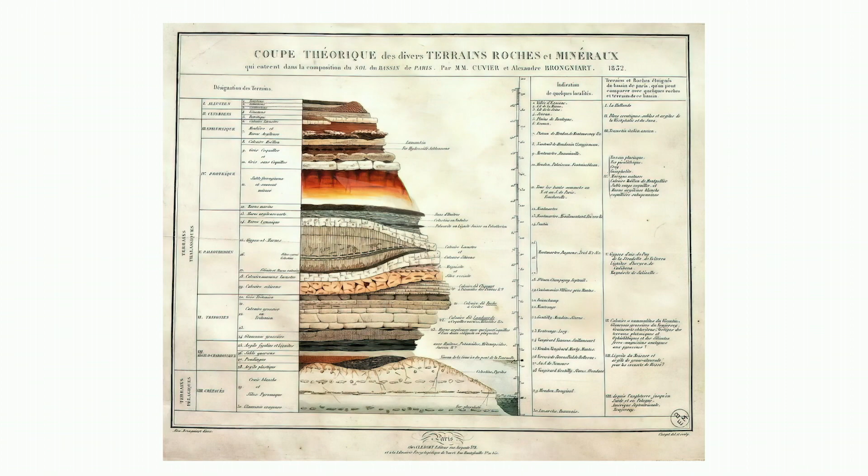So with these 2 inspirations, we have been working in many countries. I started the office 15 years ago. We've developed about 500 projects, out of which 50 were built in Europe, but also all around the globe. I will show you 4 of these projects.

The first one, number 15 — as you can see, they're all numbered chronologically, so one of the first projects, in 2007-8 I think. I was asked by Jan Mannaerts from 360 Architects to develop 4 courtyards of a woon- en zorgcentrum, a home for the elderly, that they had in Lommel.

It was interesting, this idea of 4 courtyards where many of these people would spend the rest of their lives. There were different types of communities, from more active to more passive, and we thought: if this is a kind of hortus conclusus, a walled garden, how can we bring the world to that garden? How can we give as much experience, as much sensory emotion, to these people who for the most part are confined to that space?

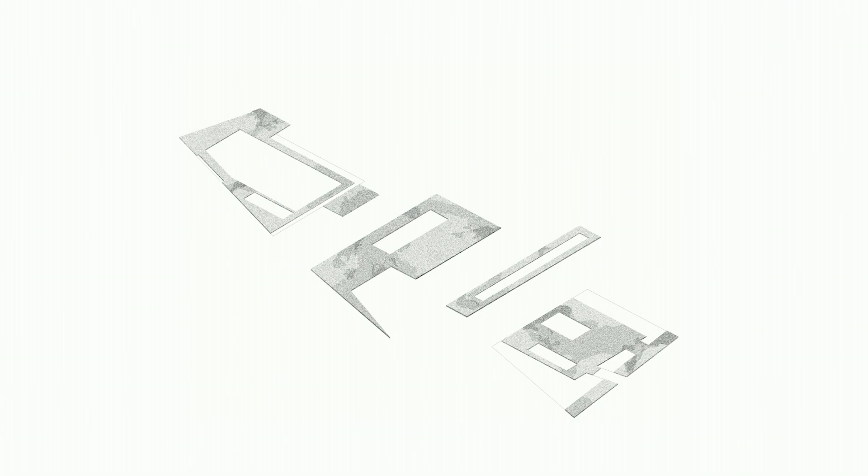So we made abstraction of the buildings, and we thought: can we see those courtyards as a kind of fragmented, continuous landscape where trees ignore the buildings and create a continuous growth, where plants could grow, where we could bring the seasons, the colors, and the smells — a kind of miniature world in which these people could live and relate to?

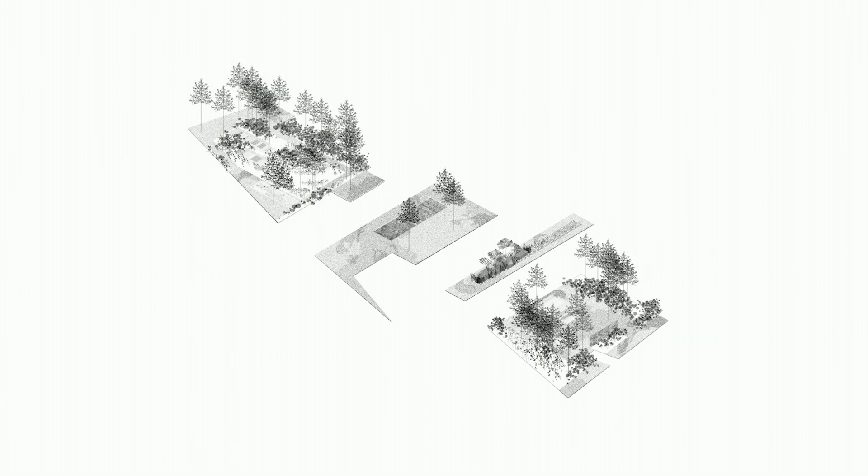The first question, of course, was what kind of hardscape do we make? What is this made of? We had a very limited budget — the OCMW has a fixed budget per square meter with which basically I could not do much more than concrete or maybe brick. And I was a bit saddened by that.

I remember going to the quarry of Hainaut and speaking to the people responsible there, who are, by the way, in the room here. I told them: is there not a way of using your material, bluestone, the most typical stone of Belgium, but for a lower price?

They told me that the leftover materials would be cut into strips of 20 centimeters. I don't know if they still do that, but we based the whole project on those 20 centimeters and on a variable length using materials that weren't A grade, but were affordable with the budget we had. So we thought, can we use those materials and work on a surface treatment to give them a flat topography.

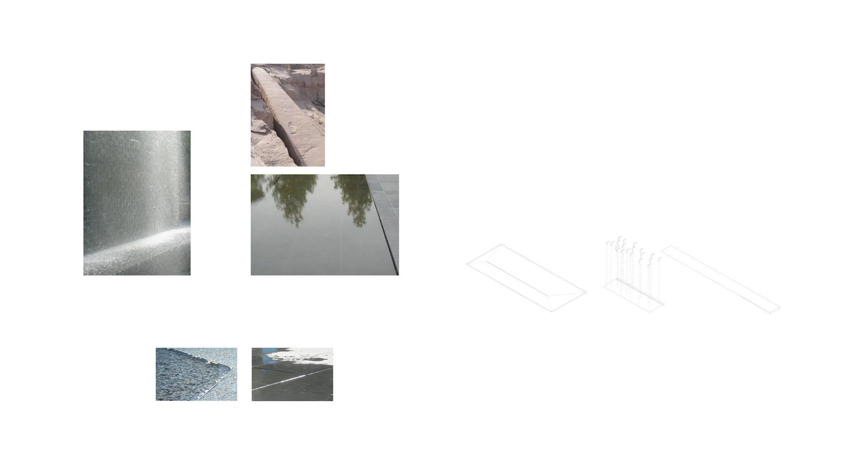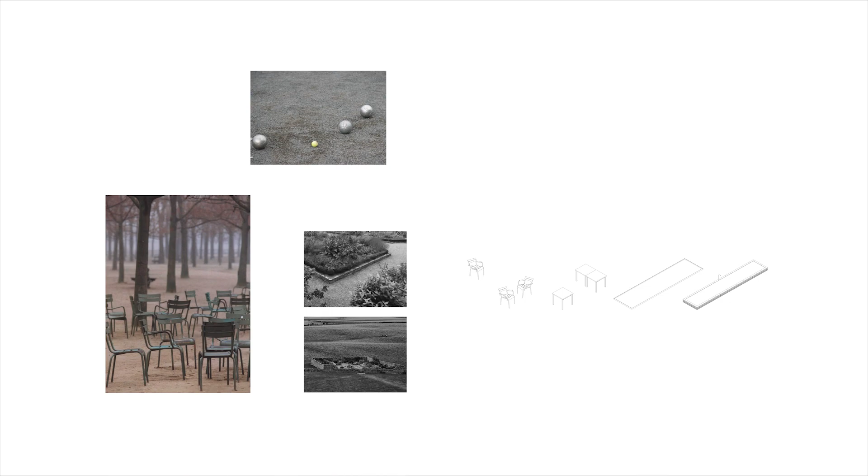So all the hardscape is in bluestone. We invented a water element that would ebb and flow, bringing that element of time into the courtyard through the water. We even used the bluestone in gravel for a possible field of pétanque. Using these elements specifically out of stone, with all the trees and plants, we came up with this very special landscape.

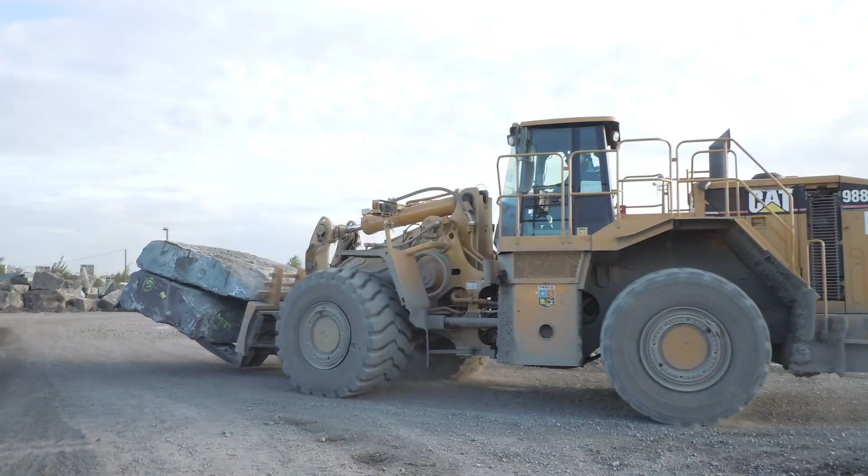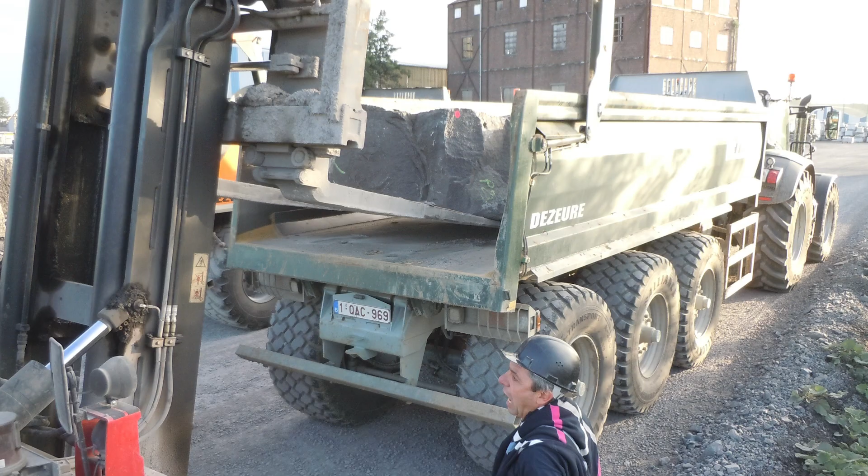And here is the quarry. I ordered my stones cut to 20 centimeters, but I wanted more, so I asked if I could have some rocks, and they gave me 35 tons for free. You'll have all the architects now asking you for stones for free.

And we made this kind of Belgian Zen garden, if you like, with our blue stones cut to 20 centimeters, the gravel, and then these big stones and a number of pine trees in between. A very calm landscape where all the therapy rooms would look out to.

Here you see this water element that ebbs and flows with time. A very calm landscape in which we planted ginkgo trees, which are the oldest living trees on the planet. They have survived for 150 million years, and they bring this beautiful yellow autumn to the central plaza, but also to the gardens around this home for the elderly.

Together with the architects, we fought hard to get the trees very close to these terraces, so that anybody in a wheelchair who could not move around much could just go to his terrace and enjoy these trees very close to where he would have his room.

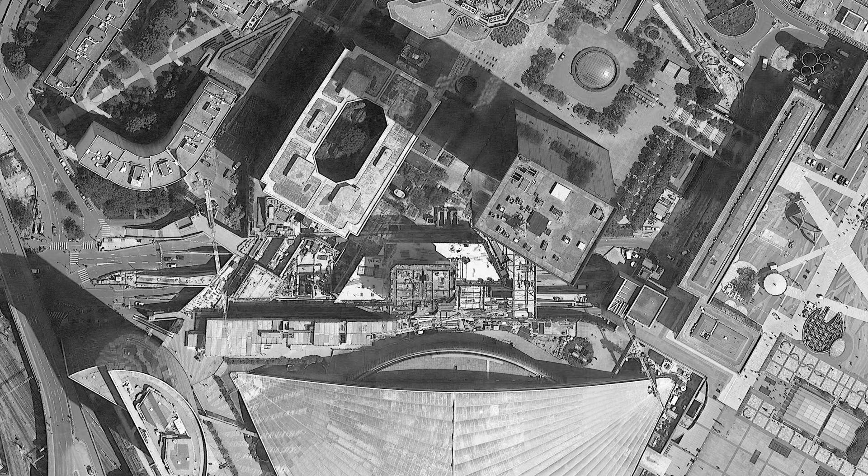And right here, this is the CNIT, this is the Grande Arche. Here is a road called l'Avenue de la Division Leclerc that enters into the esplanade of La Défense. A smart developer found, if I remember well, foundations on either side to cover this urban boulevard and to build a skyscraper on top of it.

This is the construction of the skyscraper. He asked me to design the 4,000 square meters of bridge structure in between the level of the esplanade and the level of the city.

And I was thinking, how can you make a landscape for such a strange situation? Above ground, in between these buildings, with all the reflections of the light, with the wind pattern disturbed. I thought, actually, we're quite close to a mineral situation as here in the Mont Blanc. When you walk in the Mont Blanc, and we do quite some walking, there is this idea of the tree line - when you're underneath the canopy of the trees, you're protected from the sun, protected from the wind, you have a microclimate that is very clear. The moment you leave the tree line, you're exposed to the elements.

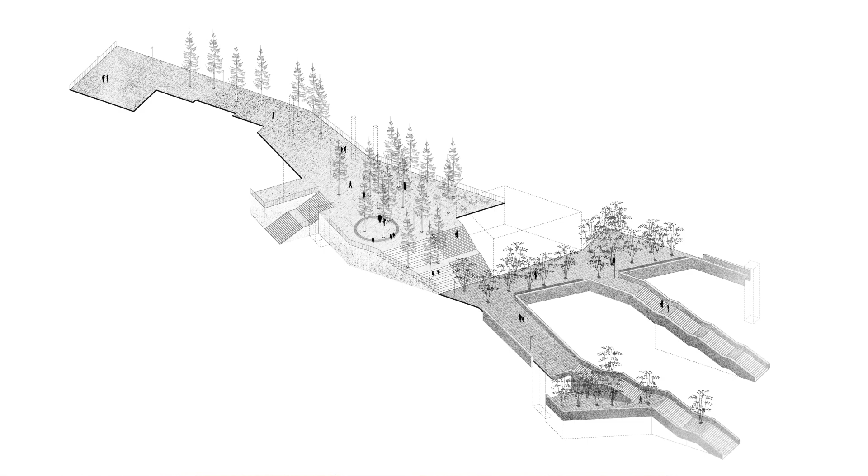So I thought, can we not understand La Défense as a kind of temporary mountain range, and can we not bring this tree line in between the peaks of those mountains? And can we not imagine staircases like avalanches of stones flowing down all the way towards the ground? So the design of the project became the search of planting as many trees as possible within that bridge structure - first ambition. Second ambition, have everything in stone, so you really feel the minerality of that space.

So working with the structural engineers, we looked at the plan, the staircases, the beams that hold up the structure, the roads for the fire trucks, the roads for the disabled. And so we came up with this plan of non-plantable area and planted all the rest.

And we used a computer program to maximize the number of trees. I remember the developer in the beginning had told me that I had to plant at least 9 trees because that was part of his building permit.

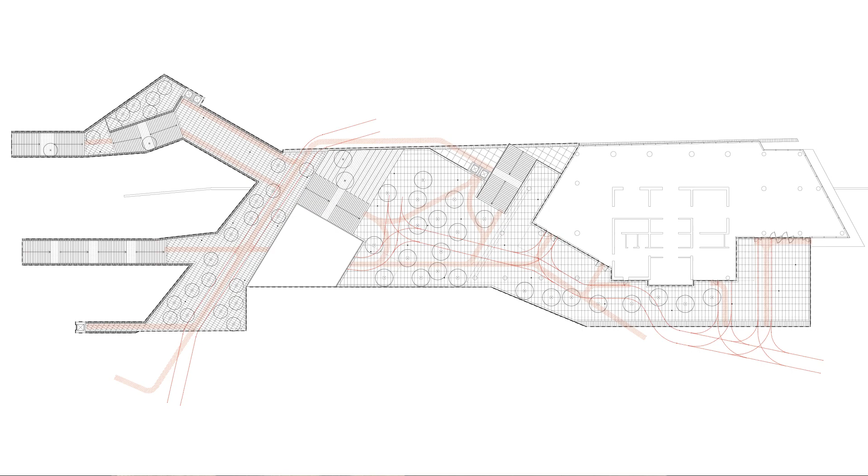We planted 50 trees without any particular order, just wherever there was an opportunity to plant. We tried to mimic the logic of nature, which wants to plant wherever it can root. So we planted those trees in only 53 centimeters of earth, but deployed over 4,000 square meters, creating 2,000 cubic meters of planting medium. What a tree needs is volume, not depth.

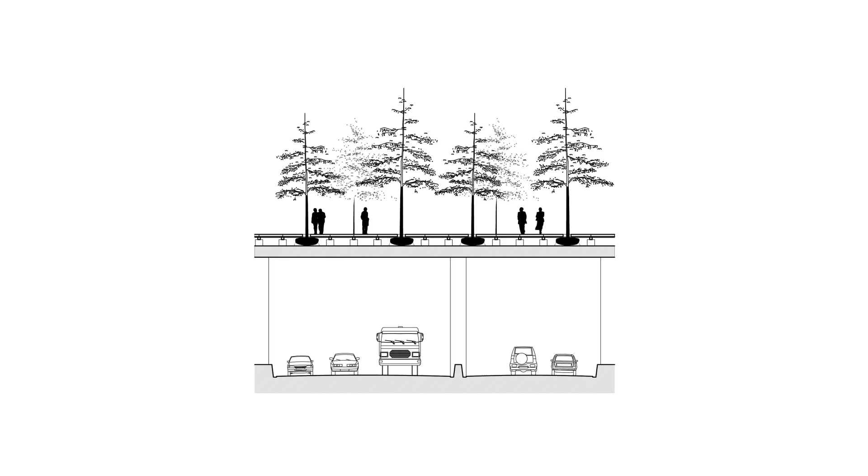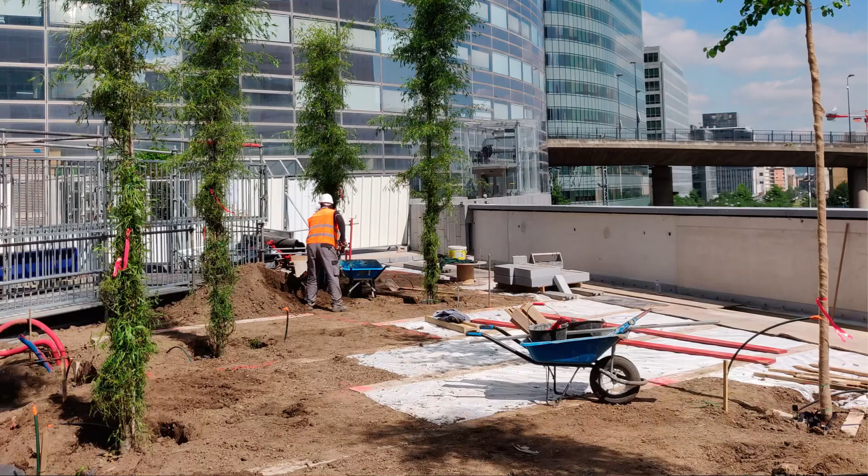We worked hard with the structural engineers to come up with this continuous layer of earth in between these little plots on which we put the beams, and on the beams we put the slabs. Here's another detail we invented: metal cages attached to the concrete columns, filled up with earth, and then beautiful slabs of granite du Lomel, French granite, with open joints placed directly on those beams, so all the rainwater goes straight to those 2,000 cubic meters of soil.

Today you get this very mountain-like feeling when you're there. Everything is stone, and you have trees sticking out of that carpet of stone. We worked hard not to have any details—no gutters, no manholes, no references to anything technical, only stones, staircases, and even railings made out of stone. The trees had been prepared in a nursery in Belgium so they would have flat root balls with quite some height already at planting. This was a couple of years ago, but you can see how the tree line is developing, and how those 50 trees will create a microclimate above that layer of stone.

Again, you see these massive stones flowing down between La Défense and Courbevoie.

Back to Belgium, to Brussels. This is a very special project: the Forêt de Soignes. If I go back, this was 2016—in November, we had an exhibition at Bozar called The Invention of Landscape.

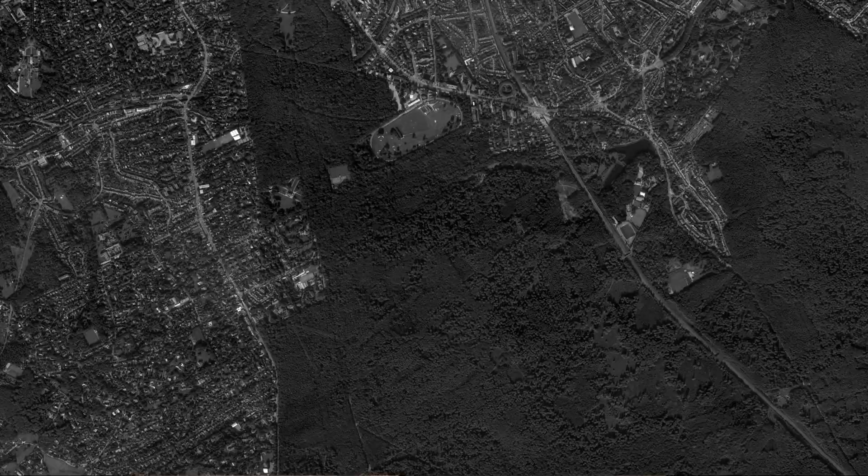This is the hippodrome, and we looked at the water—you have these little ponds here, the Hoefijzermeer, for those who know, fed by little waterways. You have these paths. So first I found a space while walking, and then, looking more into the plans, we found out that we were actually on a little ridge between those two little valleys.

We're on a high point, which I thought was nice, and there was this little path going next to it. So we thought, okay, we have this clearing, now we're going to plant 32 trees.

It was November, we're coming to the end of the year, and it needed to be opened in March. I had meetings with the associations of the victims, who told me, we don't want any official memorial. We already have all these commemorative plaques in the city, the airport, the metro. We want something for us, a place that nobody knows and only we know where it is. We said, okay, but that's a bit difficult. But the choice of the space was really related to their wish to have a space for them, where they could go with their kids and have a moment of contemplation, a moment of solace.

I was thinking, planting 32 trees is a nice gesture, but it's not enough. A forest is trees, but only trees won't do. So I told the minister, we need more, we need stones, something more anchored. And of course I wanted blue stones. Blue stone is the tombal stone by excellence in Belgium for centuries, if not more. So I thought, can we not have blue stones that help create this circle of trees?

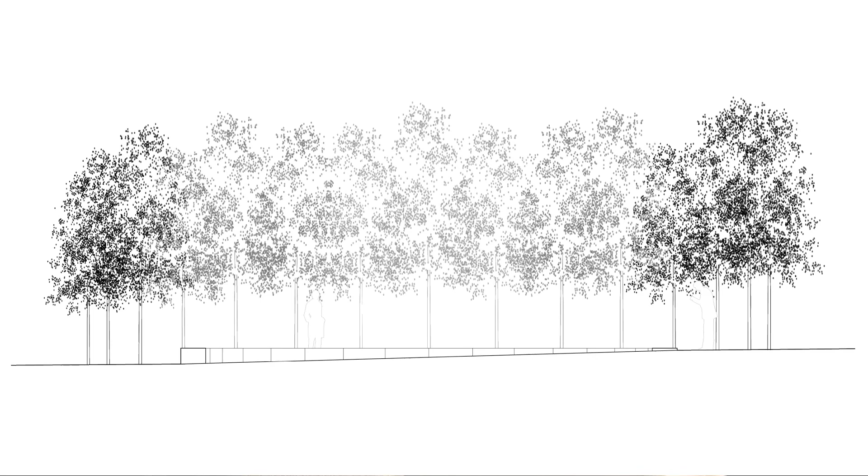The stones are on a perfect horizontal. So on one way you can easily enter the circle, on the other side it becomes a bench, and it reveals the natural slope of the valley towards this little waterway.

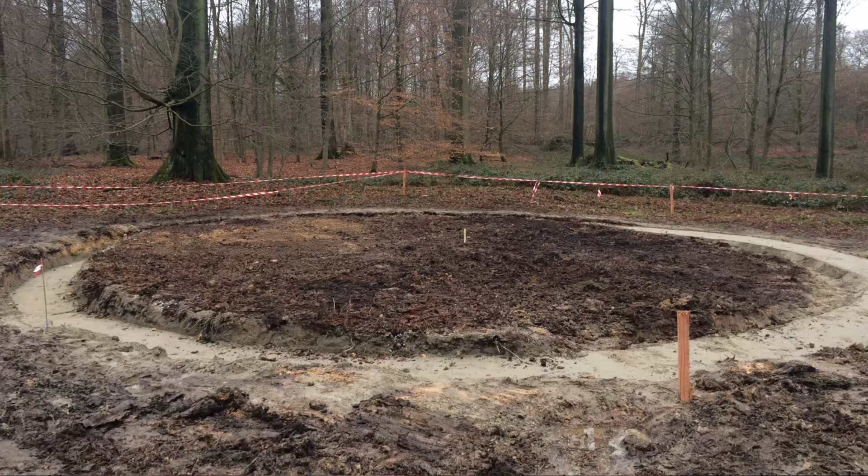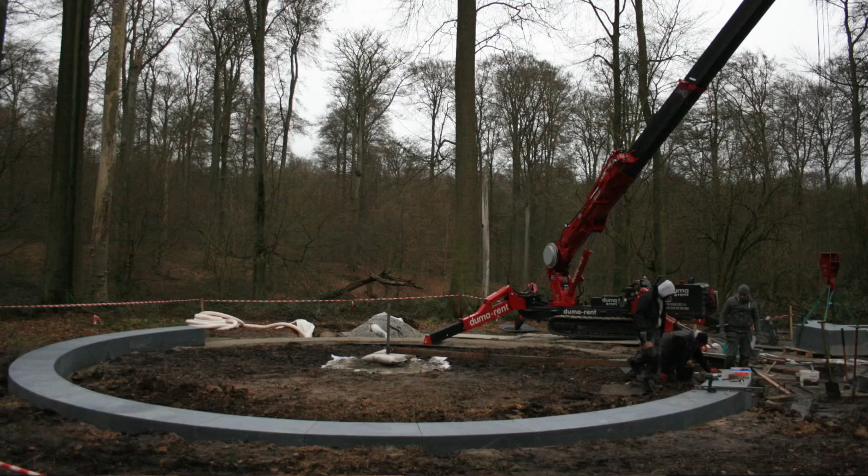We fixed the center point based on the trees around it, so the center of the void was a very important moment. Here you see, I think this is January when we still had snow, validating the center point, and then very carefully making the foundations, not touching the forest soil, getting the blocks and cutting them to size, so perfectly segmented to create this perfect circle in the forest.

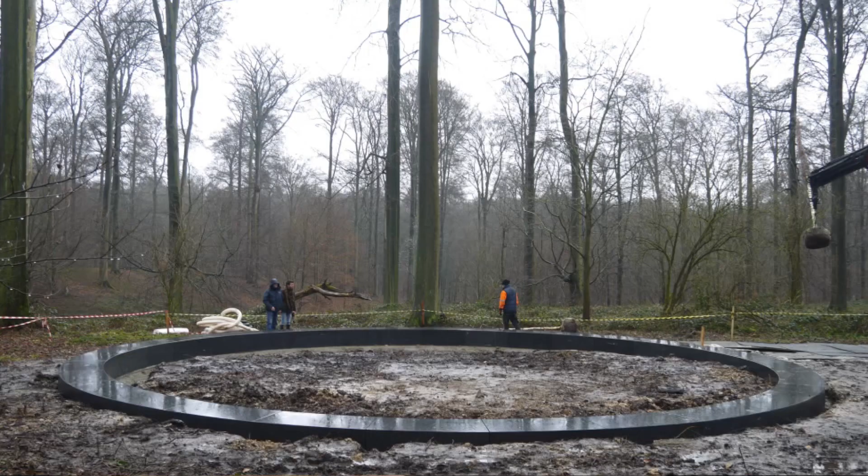I thought it was very interesting how the stones delimitate a circle in the ground, while the trees create a circle in the sky. So it's very symbolical and a very minimal way of making this monument. In a sense, maybe the most minimal project we've done, only using trees and stones, basically the two materials I like to work with the most.

Here you can see this kind of strange congregation of trees in a circle, and we planted them at a distance of two persons holding hands. We tried different sizes in the office to make the right choice. So it's 32 people standing in a circle, and when you're in the middle, you get to see this kind of void cut out of the sky.

Every year there is a commemoration organized with a choir, one year it's a choir, another year it's a guy playing the violin, so in a sense it's a very active memorial.

One day I was walking around, and I remember it was in November, and I saw flowers. I thought that's strange because normally the commemoration is in March, but on the flowers was written commemorating the victims of the hotel attack in Bamako. So in a sense it became a kind of symbol for different types of attacks. And I've heard that they also do yoga at midnight, so strange things happening there.

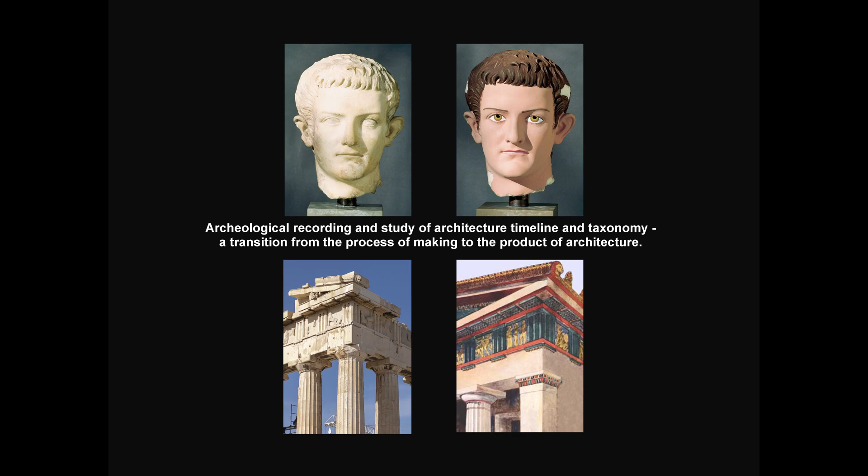It didn't take long for a crisis in architecture to emerge, with people scratching their heads, saying, what are all these motifs, decorations, and forms we're following? Auguste Choisy, Gottfried Semper, Karl Bötticher—all looking for the origins of architecture—quickly realized that, actually, the origins are in the making of it, even for the Greeks, really abstracted in stone, but culturally relevant.

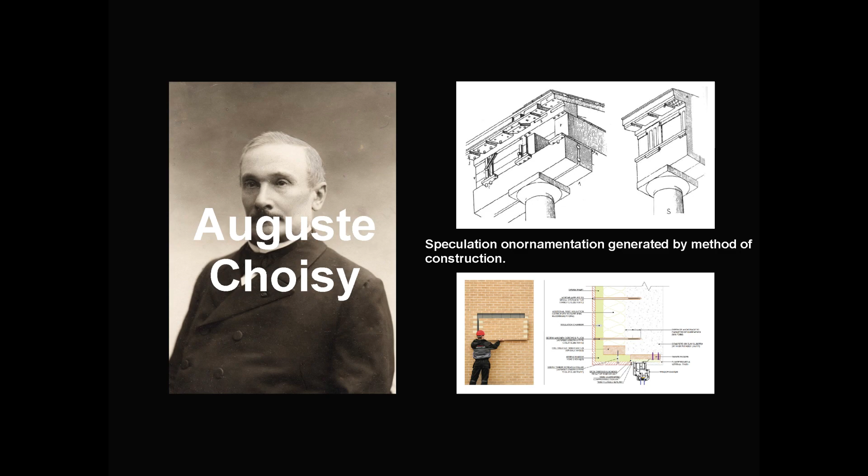At that time, mid-19th century, Industrial Revolution, in England we revert to the Gothic Revival. In Germany we have Carl Friedrich Schinkel, the leader of the neoclassical period. He actually comes to England to tour the whole country, ostensibly to look at the British Museum. And he has a moment of crisis, realizing that all these buildings going up during the Industrial Revolution in England have very little reference to the classical language.

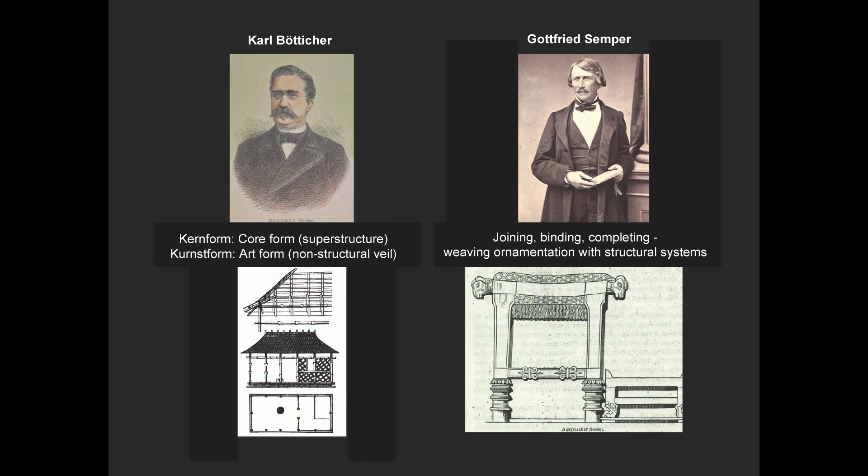Semper is in London a few years later. Gottfried Semper and Karl Bötticher are sent by Schinkel to dig into this, and they all agree that really all forms of architecture have their nature in understanding what the building materials are and how you combine them. So Semper eventually coins the phrase joining, binding, and completion—whatever method is convenient at that age becomes commonplace, culturally relevant. It is the completion of that architecture, and it should always change.

Hopefully Wagner, Adolf Loos, and the Vienna school are picking up on Semper's teaching, and most of you will know that Henri van de Velde is actually the father of the Bauhaus. He's in Germany, but it's post-First World War, and he's not allowed to become head—he recommends Walter Gropius. All of them are picking up on Semper's mission: what is this architecture of the new industrial age? Eventually they find it, and we might characterize it as the bicycle tube that's turned into a chair, and so on, with the architecture.

Interestingly, at that very same time in Spain, we have Federico de Onis, who's a professor of literature. He's teaching Dali, Lorca, and Buñuel, and arguing we are already in a postmodern period. Why on earth are we looking for yet another dictum? We should really be looking as broadly as possible for representation from every cultural reference available, especially in Spain.

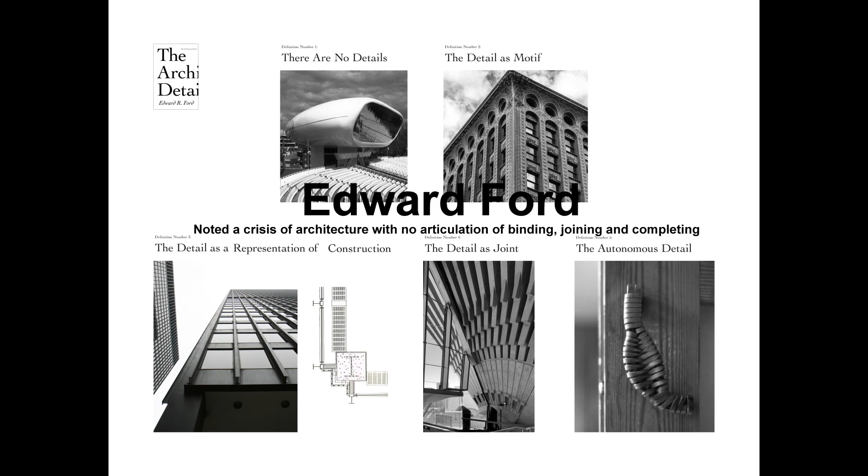And of course nowadays they tend to change as often as possible. Another moment of crisis in the last few years—hopefully most of you will know Edward R. Ford, who's looking at it in the same way that Semper and Bötticher would have, but from a slightly different angle, and he defines five types of detail. Really what he's talking about is there are details that are formed by just looking at a beautiful drawing you might have made, and then trying to make it work, while other details are understood through the materials and structure at hand, and the architecture is defined from that.

You might ask, well, so what? So what's the big deal? Let's have architecture that can look like anything and let anybody else construct it how they wish. What's the big deal?

We might ask, there are ethical questions to how we make things. What ethical questions are those? You know, we develop a skill—do we need to answer any ethical questions with that skill? Well, I think we probably do.

You know very well that buildings have to stand up and not fall on people's heads. They mustn't burst into flames. Hopefully we don't burn too much energy to heat them, and don't send our clients bust. And of course today, more urgently than ever, it's the embodied carbon of those materials, those material choices—in effect, nothing to do with the appearance of the building. So we're not talking about defining architecture by the appearance of the building.

And I think there was a chap here called Protagoras—a 450 BC Greek teacher, really what we call the first relativist. He's essentially saying there are no real immutable rules to anything. It's up to us to negotiate, make those decisions, and renegotiate them on a regular basis, which is essentially what we might define as a sort of ethical framework for architects today.

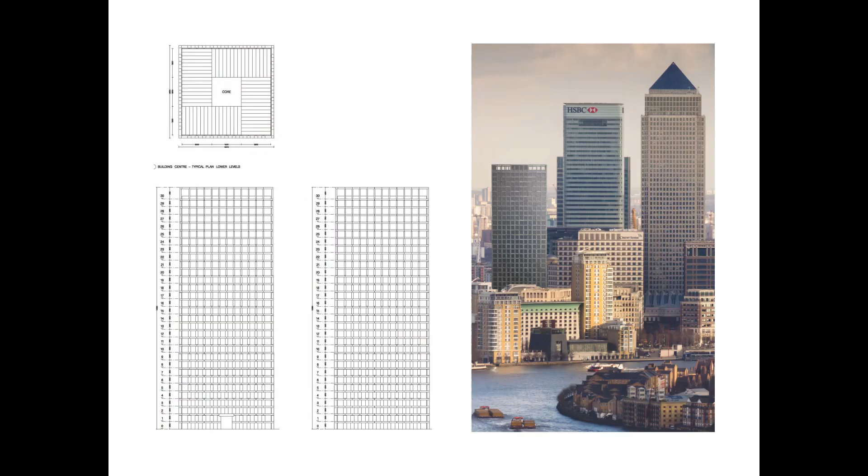So let's talk about what we're trying to do. At the bottom of this image is a speculative tower made of stone. After doing a couple of projects in stone, we were asked to run an exhibition, and for that we asked one of the largest developers in London, Canary Wharf, to give us a typical brief. We just wanted to test whether it's possible to make a building in stone with structural engineers, environmental engineers, mechanical and electrical engineers, and so on—the full design team, including cost consultants.

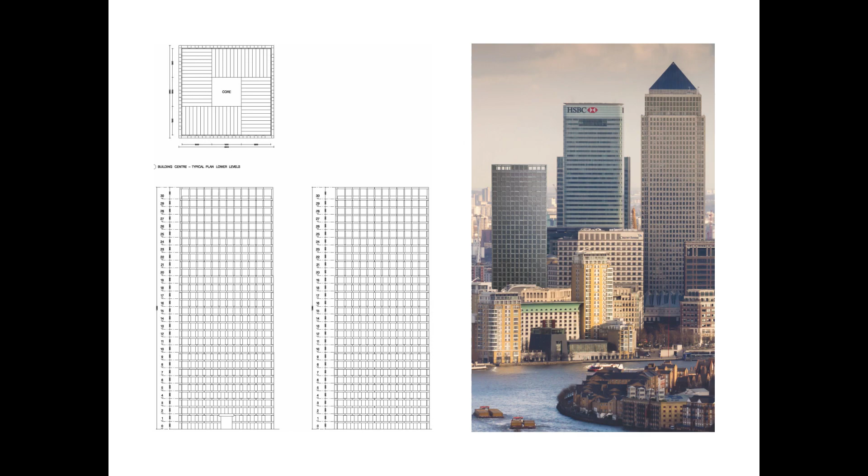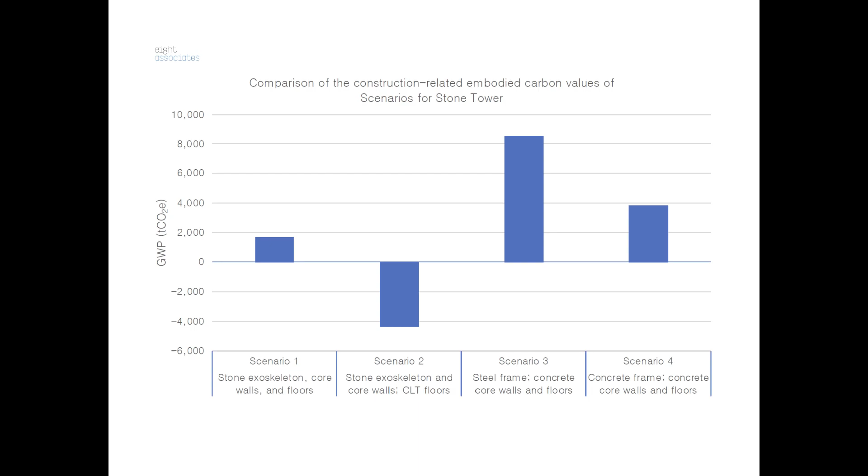Then scenario 2 is where we're using timber—timber floor plates, but the exoskeleton of the frame is stone. What that immediately tells you is that if you are counting the sequestered carbon in timber, you've created an office building which is better for the planet—in other words, you've absorbed carbon from the atmosphere. It also turned out the timber and stone version was cheaper than the concrete or steel version by about 10%, which to a developer of that scale is not a small, insignificant amount.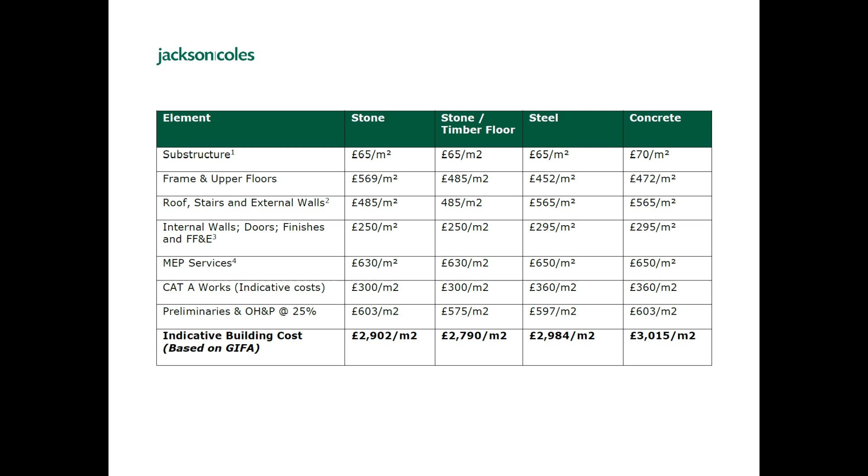So we carried on with this - we asked some of our postgrad students to help us because we're only doing one project at a time, learning one project at a time. We thought, well, let's put 14 brains together, bring as many materials as possible and record what their embodied carbon is. Initially they were all in muddled order, and we realized, well, if you put them from worst to best...

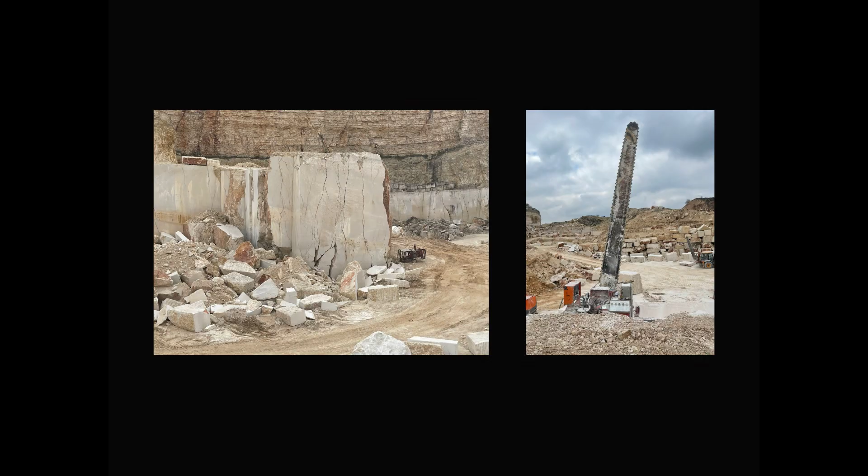And hypothetically, if you decide to make your entire building out of timber, again, you've made the world a better place. But obviously you can't have the electrical, the plumbing, the glazed windows, and so on in timber. So at some point you have to make a selection.

This is not to say - the reason we made a color code, a traffic light system, is like imagine going to your supermarket and pushing your trolley along. It's not to say you're banned from ever putting a bit of red in your basket. It's just to remind you, yes, of course you can have a mixed diet and occasionally put some lardons or something to mix with your salad. It's not eliminating steel or concrete, it's simply saying make some intelligent choices.

We might actually try and get some projects now. So the first project we used stone on was a renovation of a house where they wanted the original staircase back. It was originally a stone staircase, but actually used steel.

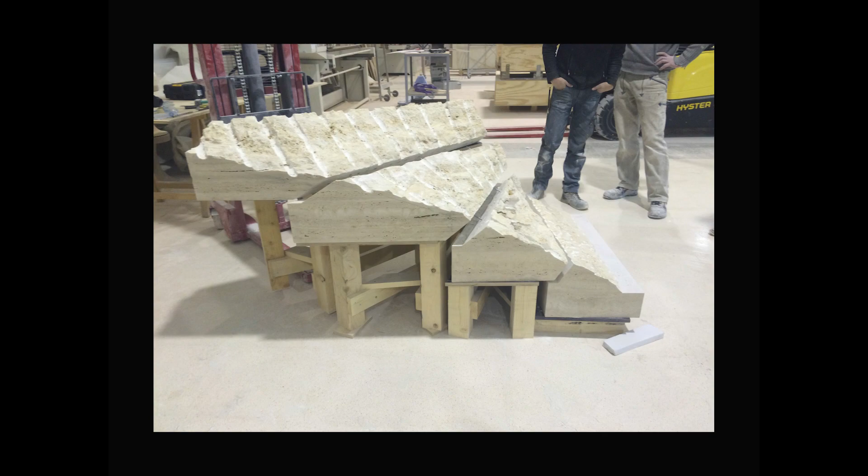We suggested reusing an older method of making stone staircases where they use nothing but the stone itself, and it's what's called reciprocally loaded - so one tread is resting the load on the other.

And while we were there, we noticed these big blocks of stone coming in, and it occurred to us, well, at the moment most of us as architects around the planet are working on stone buildings where it's a steel frame or a concrete frame with cladding, multiple layers of waterproofing, fireproofing, insulation, vapor barriers - things that punch through all that and then come out and reseal before you get a veneer. Surely that's a slightly absurd way of putting this building together.

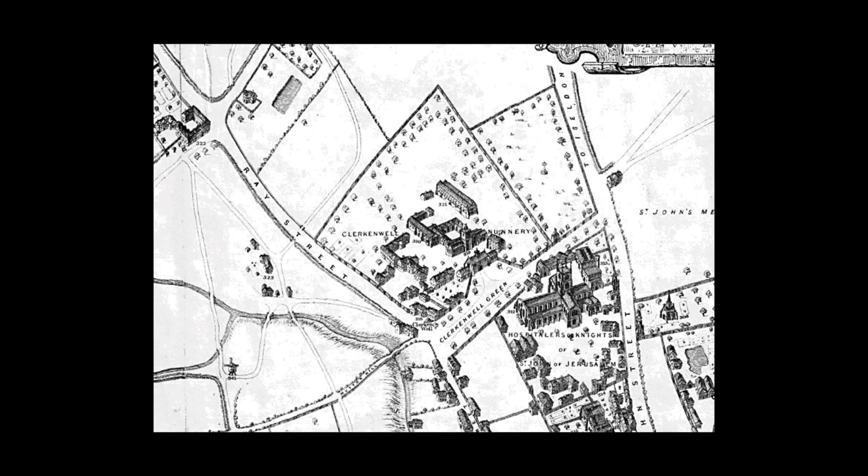It's just a question - we didn't know the answer. It's a part of London that had no development on it until the Norman invasion, and it was all a series of nunneries and monasteries, all in limestone. Over the years, because it was outside the city walls, the laws were quite lax, so it became a place of pamphleteering and printing revolutionary ideas all the way into the early 20th century.

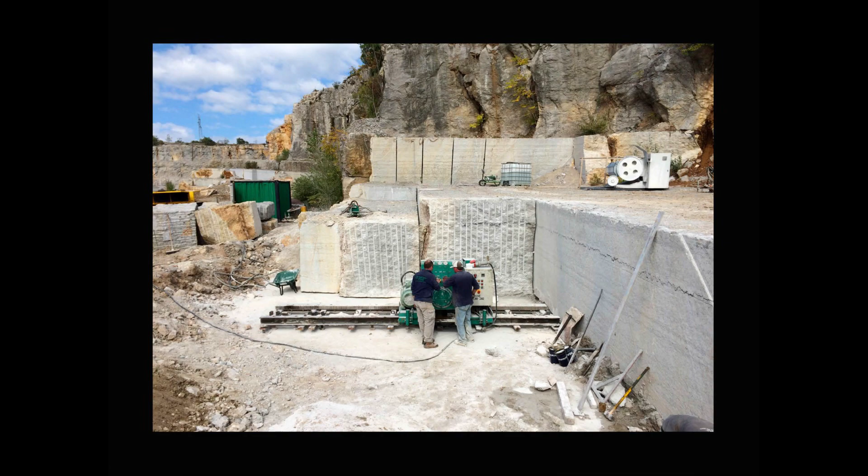And our neighbor is actually now the Marx Memorial Library, where Karl Marx - it was actually started by William Morris, but Marx wrote for it, and Lenin used the printing presses. It's always been a place of radicalism until the post-war period.

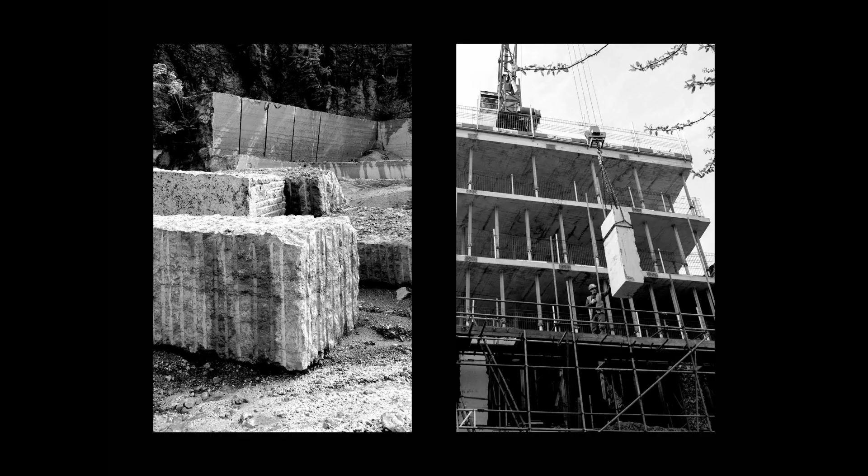So we looked at - instead of building as the post-war period has done with these steel frames and pretending that the brick and the stone is actually load-bearing, let's ask the question: is it possible? Is it cheaper? Does the embodied carbon come down? And these are questions that the entire building industry in the UK appears to have forgotten.

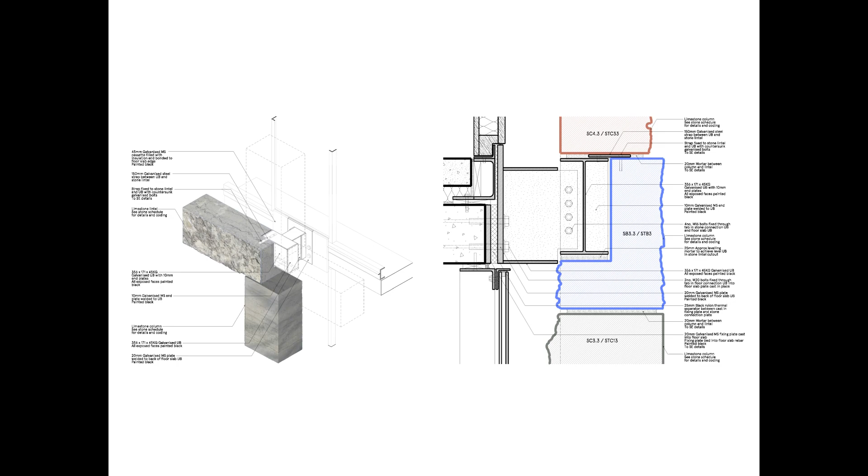I'll try and get through to the next project. So this is us making use of waste stone with an Italian group of stonemasons who find that there's a vast amount of wastage in the tile industry. What can you do with it? At the moment it's crushed, waiting to be made into other materials.

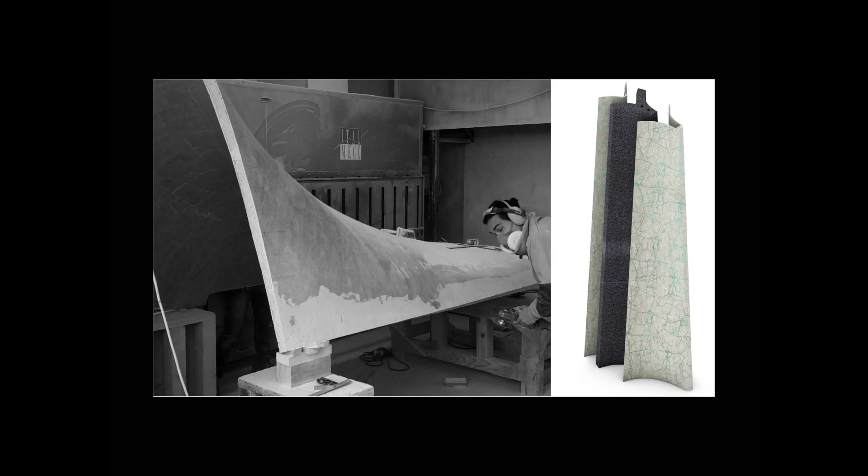With this Italian company, what we've done is broken those tiles on timber formwork and then rebonded them with a resin. It occurred to us after making this 30 millimeter shell and using it as structure, why not bond insulation within that, and then it becomes external finish, internal finish, and thermal envelope at the same time.

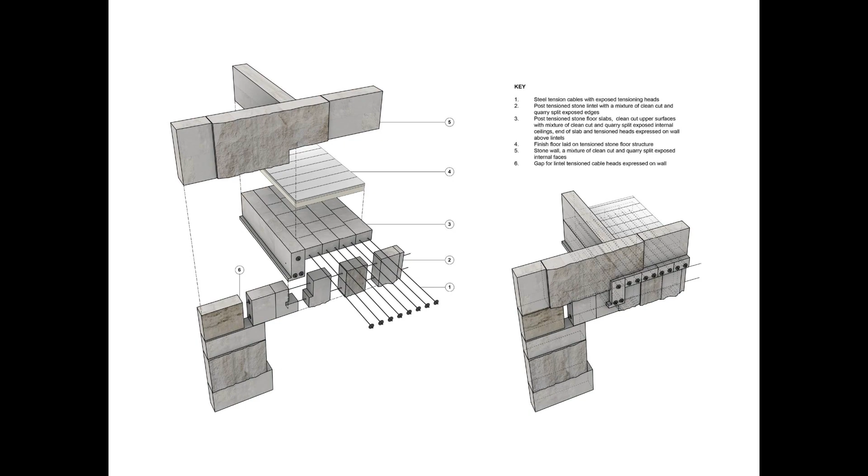Since then, what else can we replace in terms of steel structure and concrete structure? So we've been doing a number of research projects and actually building them. Luckily we've got some clients who are quite happy to experiment.

This is our group of students on a 14-meter long beam, where again you don't know these answers until you're asking stupid questions. Can I get a 14-meter long piece of stone to span? Well, you probably could, but it would be very hard to find, expensive. Why not just cut it into smaller pieces and put one or two rods in there to span that?

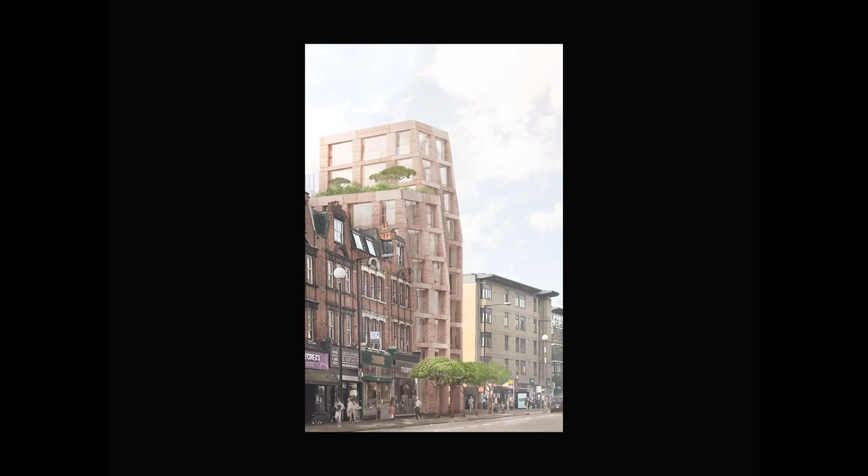And there's the answer. It turns out to be high performing. It lasts better in a fire than steel or concrete, so we burnt it for 3 hours and it had its structural integrity for 3 hours. So you only actually need it for 2 hours.

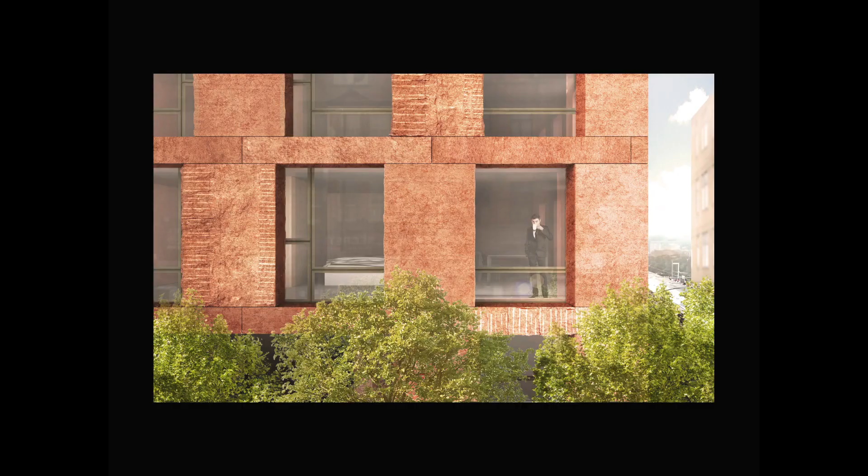This is one where it's on site now. It's where we were using limestone, but we tested basalt, and basalt born from a volcano performs far better than limestone. So keep asking the questions. Your experts, the stonemasons and engineers, will help with those answers. Together, you'll get to those answers.

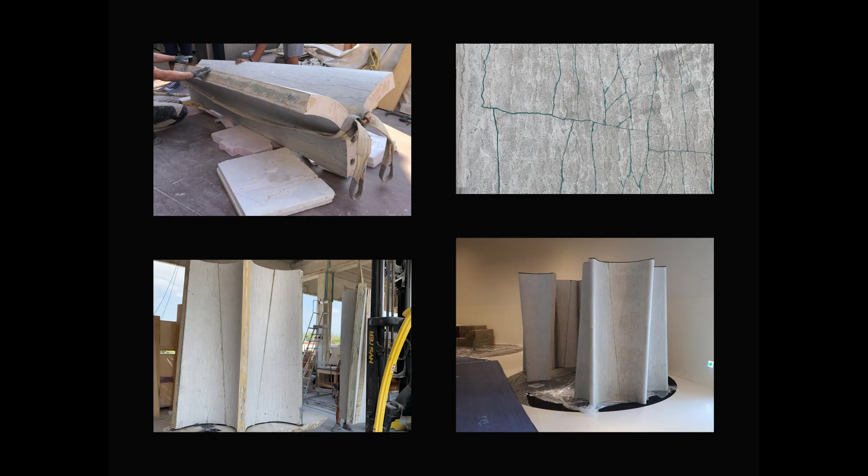So these are the various, I think, yeah, there we go. That's good timing. So hopefully the takeaway is ultimately the slide on the embodied carbon. Hopefully none of you are allergic to fast flashing slides. Oops, there we go.

Make whatever building you're looking at, look at the stone. They're at 33, 32 kilos per cubic meter compared to brick. In England, or the UK, we import pretty much most bricks.

I was at a similar event in London with six assembled architects, one of which was going to be chosen as the master architect of that year. To get the questions rolling, I asked: all of you have used brick, some of it Belgian, some Danish, some German. All looks beautiful, but why brick? Oh, well, there's a tradition now to use brick. It's easy to get through planning departments and conservation, and it looks nice.

And I said, well, why not stone? Oh, well, the people don't understand stone, big pieces of stone. I said, well, stone is just monolithic stuff underneath our feet. If you cut it to a brick, why not use that?

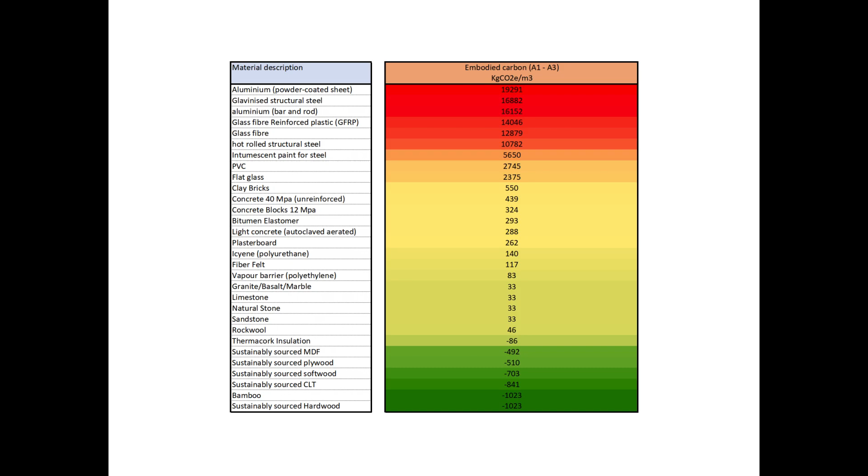Make an intelligent decision. Learn — we didn't know all this stuff. Learn of those materials and then begin to make intelligent decisions on what your building is made of. That is no longer just a beautiful drawing that somebody else is helping you put together, but you're thinking well in advance: what are my material choices, and how can I bring them together to form this architecture, to define this new architecture. Thank you.